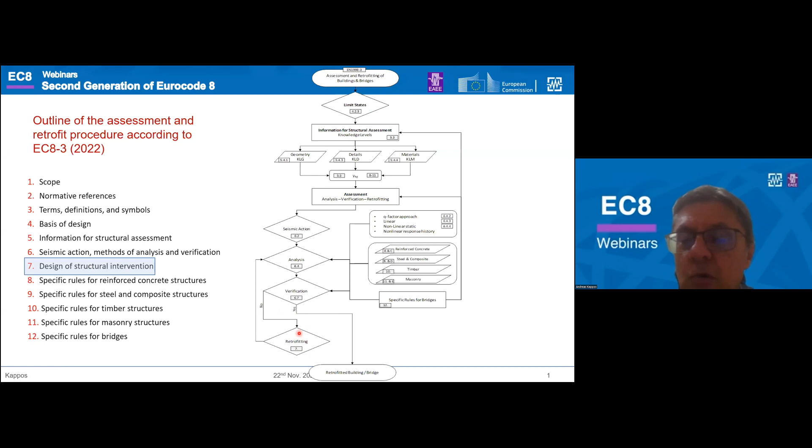And this is addressed, admittedly in a very brief way, in Clause 7, which is the design of the structural intervention, which actually comes after some sort of verification is not satisfied. So in this case, you will go to the design of your retrofitting. What are the key changes?

Well, as I said, the scope has been extended to cover bridges. This document is covering both the retrofitting of buildings and bridges. And after a very long discussion, which is also briefly referred to in the background document, a very brief background document that I had drafted for this clause, it was deliberately left out to allow some flexibility.

And the idea is that the code tells you how to verify your retrofitted or your upgraded building, but it only gives you some principles as to how you should structure or you should decide your interventions.

Interesting and important change is that for the first time it is explicitly stated that you can do this upgrading of your structure by reducing the demand, right? So by using some sort of passive system, but it does not give you any detail of these systems, because these are given basically in parts 1-1 and particularly in part 1.2 with more detail. It is clause 9 of part 1.2, if I remember correctly.

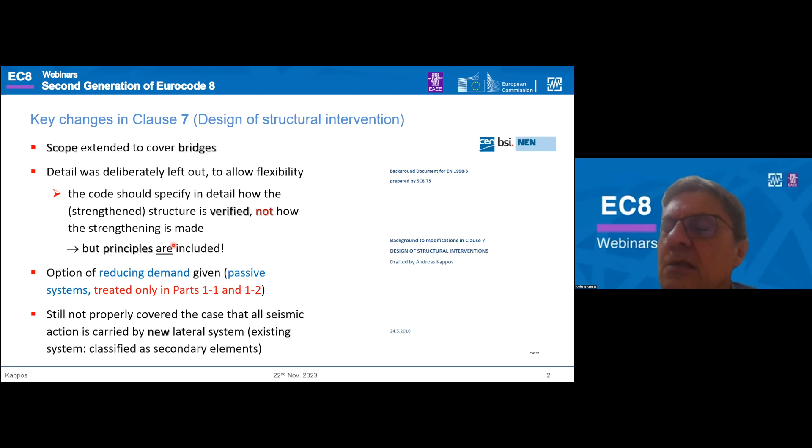Still not properly covered is the case that all the seismic action is carried by a new lateral system. In this case, it is not allowed to do what many people are doing all over the world. This is something that we would like to emphasize. Many engineers, for simplicity, say oh yes, I have put a new lateral load system, so all the lateral loads, basically the seismic load, will be covered by this new system, which is not correct.

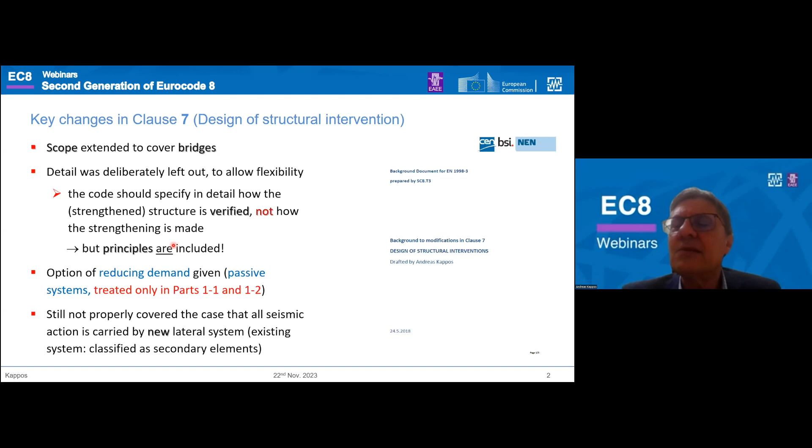You have to address only what happens to your existing structure, which is still there. So as a minimum, you should classify the existing structure as a secondary element, and you should take it from there.

Now, what are the criteria for structural intervention covered in clause 7.1? You should identify gross errors, and they should be appropriately remedied. In highly irregular structures, structural regularity should be improved both in elevation and in plan.

Of course, this is easier said than done. How can you do it? Well, can you improve it? You can improve this regularity by modification of the strength and the stiffness of a number of the existing components, or indeed by the introduction of new structural elements.

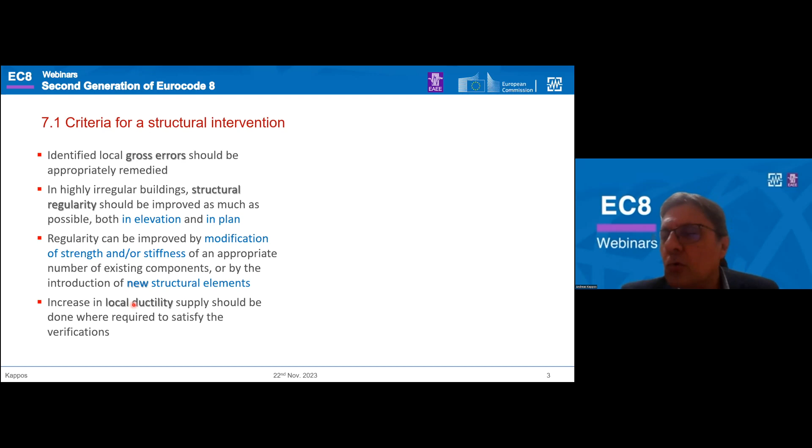For example, in a building, you could add some structural walls and improve the regularity. Of course, this should be decided on an ad hoc basis, keeping in mind that you may or may not have the possibility to add these walls due to architectural functionality reasons.

Increase in local ductility supply should be done where required to satisfy the verifications. Increase in strength due to the intervention should not reduce the available global ductility. So the two are interrelated here.

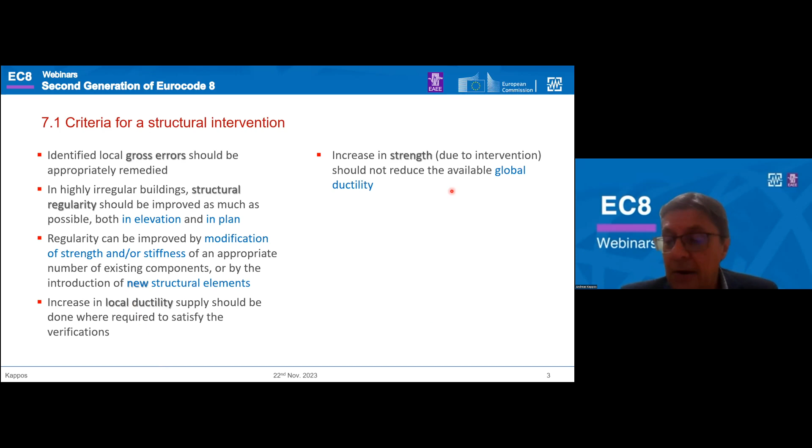And there is a specific subclause for masonry structures. Non-ductile lintels should be replaced. Inadequate connections between floor and walls should be improved. In my opinion, this is a very important requirement, or indeed, in this case, it is a recommendation.

And out-of-plane horizontal thrust against walls should be eliminated. And as I said, there is an option. Instead of strengthening or upgrading, as it is called now, the existing structure, you can reduce the seismic action effects by introducing seismic isolation, typically with some sort of additional damping.

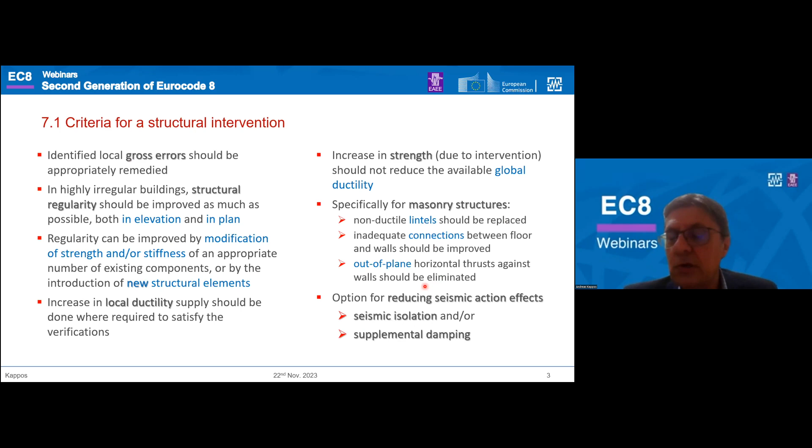What are the types of intervention, which, by the way, may be used in combination? Local or overall modification of damaged or undamaged elements, which may include just a repair if it is a slightly damaged element. Could be upgrading.

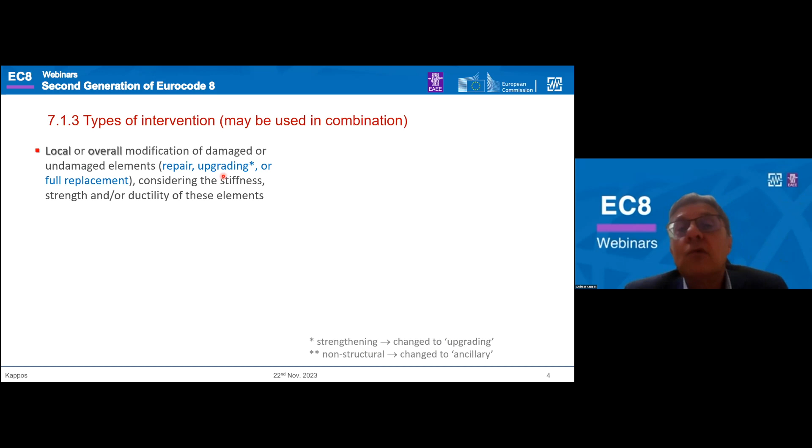Upgrading is the new terminology used for strengthening, in the sense that upgrading, for example, can also include isolation and dissipation devices, which is not the case with strengthening. Or indeed full replacement, considering the stiffness, strength, and ductility. Addition of new structural elements, for example, you may add braces, you may add steel, timber, or reinforced concrete belts in masonry construction, or indeed you can upgrade your infill walls.

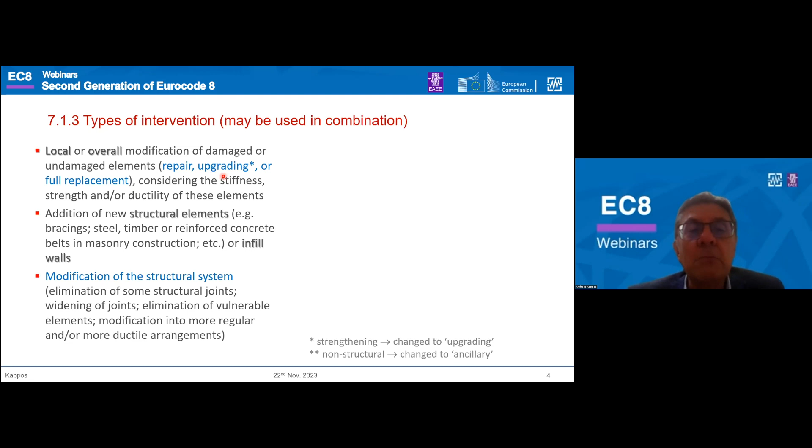Modification of the structural system: for example, you can eliminate some of the structural joints, you can widen, and so on. So there are several options. You may add a new structural system to resist part of or the entire seismic action.

I have already made my comment that in doing so, you should not forget that you have an existing system, and you should check that this existing system will not collapse or be very heavily damaged while your new system is still in a pretty good stage. This is a very important aspect in my understanding.

Possible transformation of the existing ancillary elements. The ancillary elements are what we called for many years the non-structural elements, but after a long discussion, now we call them the ancillary elements. I'm sure those of you who attended the Part 1-2 seminar have heard about them. Addition of passive protection devices, dissipating bracing and base isolation, or indeed mass reduction, restriction of use, or change of use of the building, which of course is not really good news for the owner of the building, as you may guess.

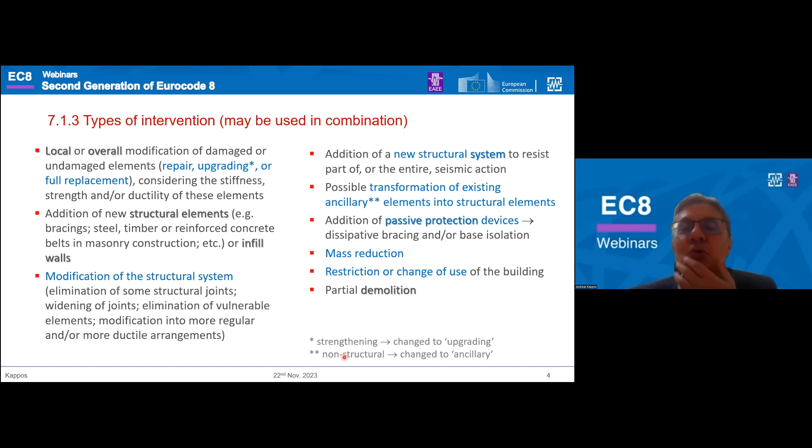And indeed partial demolition, which is even less good news to the owner. Okay, a few things about the ancillary elements.

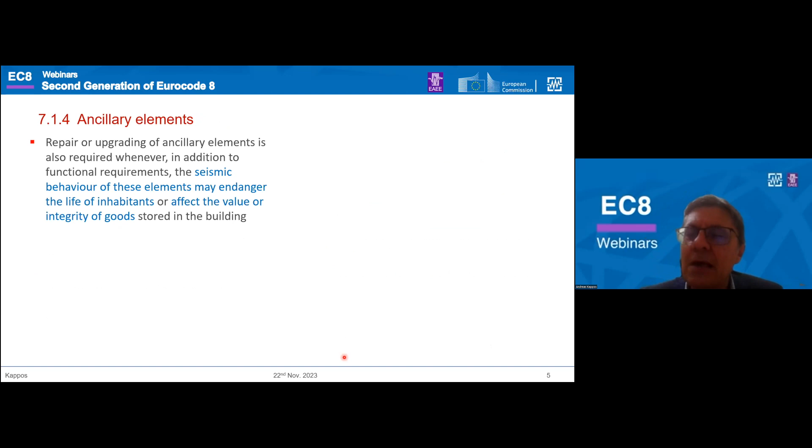Repair or upgrading of ancillary elements is also required whenever, in addition to functional requirements, the seismic behavior of these elements may endanger the life of the inhabitants or affect the value or integrity of goods stored in the building. I have read this verbatim because it is a very carefully worded paragraph. In such a case, of course, full or partial collapse of these elements should be avoided.

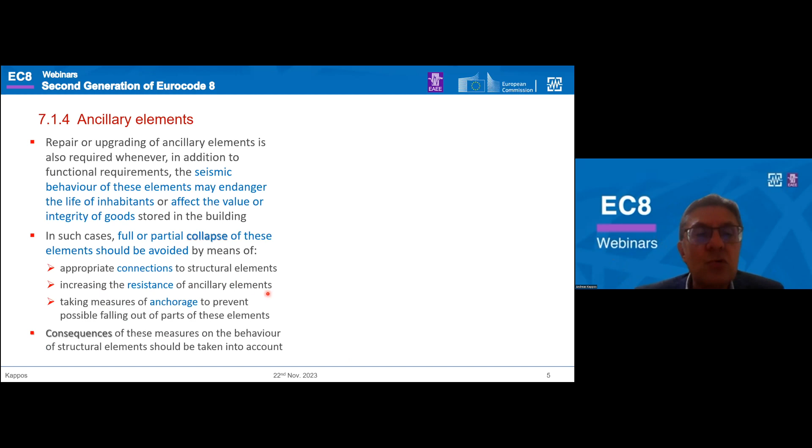How? By appropriate connection to the structural elements, increasing the resistance of ancillary elements—so basically making your masonry infills stronger—and taking measures of anchorage to prevent possible falling out of parts of these elements. Always the consequences of these measures should be taken into account and communicated to the owner.

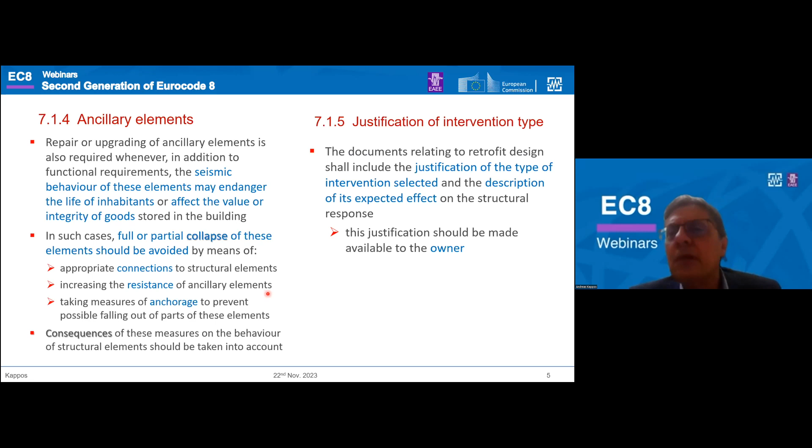The justification of the intervention type: the documents relating to this should include the justification and should be made available to the owner. Now, the second and last part of this section, of this clause, is the retrofit design procedure.

This, of course, is extremely critical. It includes basically three steps, all of them important: the conceptual design, the analysis, and of course the verification.

Conceptual design: first of all, it is strongly encouraged to use a preliminary analysis, which was also mentioned in a little more detail by Professor Franchin, because this can inform the selection of your retrofit scheme. Then the selection of the techniques and materials, and the type and configuration of the intervention—a very important part in the whole procedure.

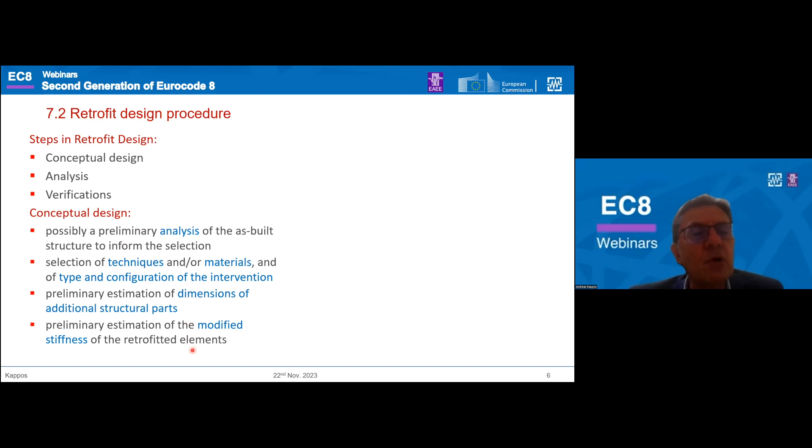The preliminary estimation of the dimensions of the additional structural parts, for example structural walls, and the preliminary estimation of the modified stiffness of the retrofitted elements. Then, of course, you have the analysis.

The analysis was already covered by Professor Isakovic. It should, of course, account for the modified characteristics of the building. The verifications, again as per section 6.5 and also 5.5 that Professor Franchin presented, should include both existing, modified, and new structural elements, and as a minimum—as I already mentioned in my first presentation—you should check the limit state of near collapse.

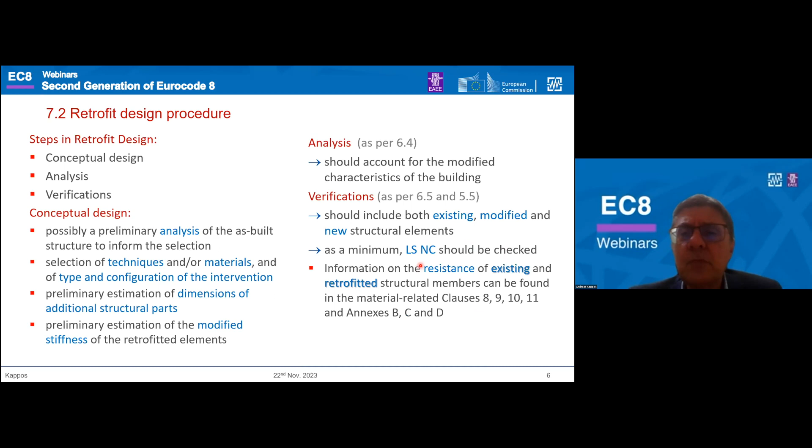Information on the resistance of the existing elements—how do you cover all these things? You need specific provisions depending on what material you are using, for both the existing and the retrofitted structural elements. What resistance does an element have with an FRP wrapping or, for example, a reinforced concrete jacket around it? For this, you go to the pertinent clauses.

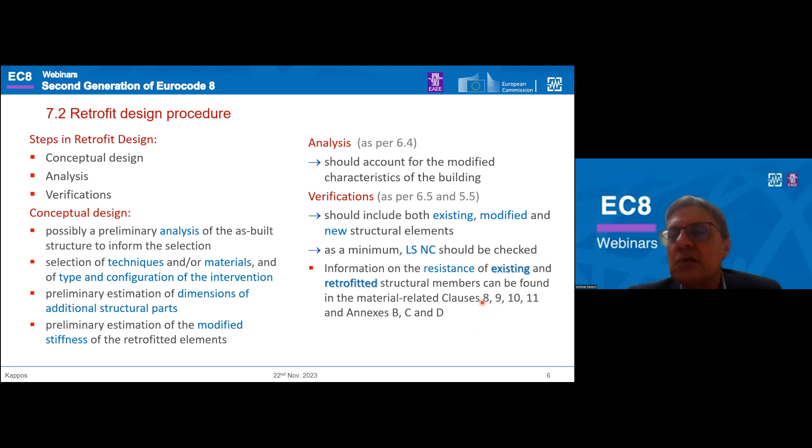Most of this information is found in clause 8 on reinforced concrete structures, with more limited information in the remaining chapters. Just to give you an idea, and not leave it at the conceptual level, you can find information on the resistance of retrofitted reinforced concrete structures in section 8.6. This, I understand, will be presented by Professor Chrysostomou later on.

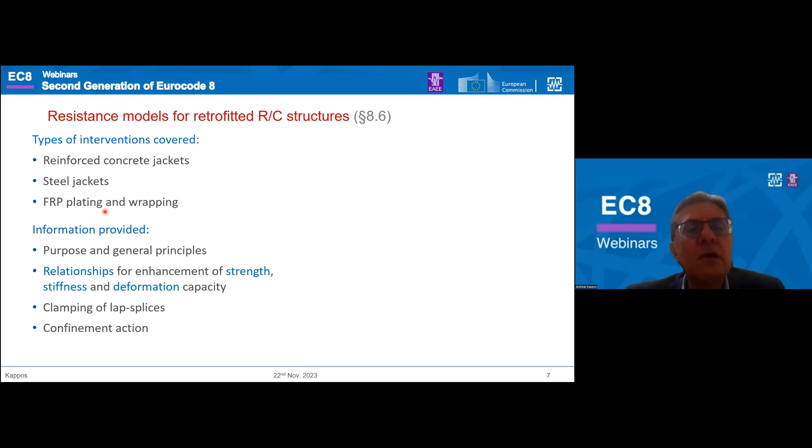Of course, not all types of new materials or new techniques are covered. We are focusing basically on those for which we had sufficient state of the art—sufficient testing data and so on. So we're covering reinforced concrete jackets, steel jackets, and FRP plating and wrapping. These are the ones covered, giving the relations for strength, stiffness, and of course the available deformation capacity.

Just as an example, for jacketing, which is arguably the most common type of strengthening, or upgrading with the new terminology, of concrete columns, but not only columns - also beams, even footings can be jacketed. The approach used is basically to modify the capacity, the resistance, or the deformation capacity of an equivalent section which is of a monolithically cast member.

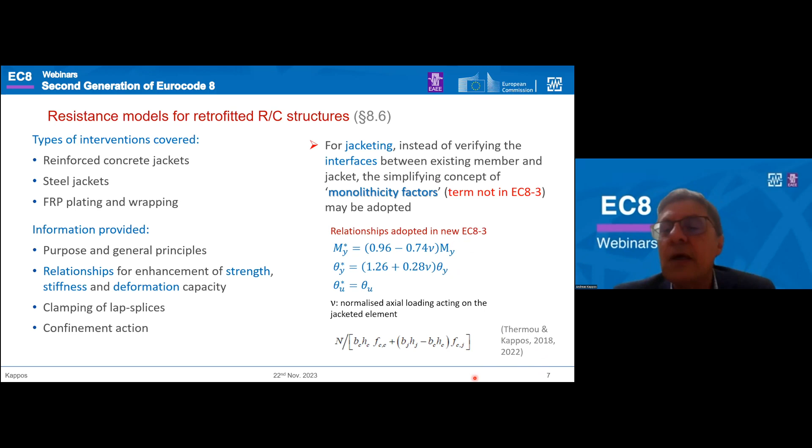These monolithicity factors, as many people call them, although it is not a term adopted in Eurocode 8 Part 3, the relationships in the new Eurocode 8 Part 3 are of this form: the yield moment of your jacketed section is the yield moment of an equivalent monolithic section multiplied by these factors. For the first time in the literature, we're introducing monolithicity factors which are not just dry numbers like 0.8, 0.9. They include meaningful parameters, and the most meaningful, as we found with Gina Thermou some time ago, is the axial loading, defined as here.

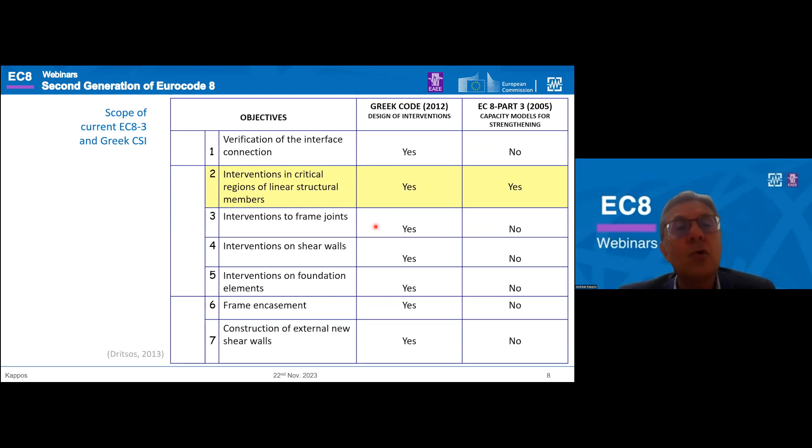This is basically the entire section. This is an interesting table that my colleague Professor Dritsos has compiled some time ago. It covers, strictly speaking, the current code, but most of the yes and no are applicable to the forthcoming new Eurocode 8. As we mentioned in the background document, in applying the code the engineer needs guidance additional to that given in clause 7. You certainly cannot carry out your retrofit design just by using these relatively brief provisions that I have just presented.

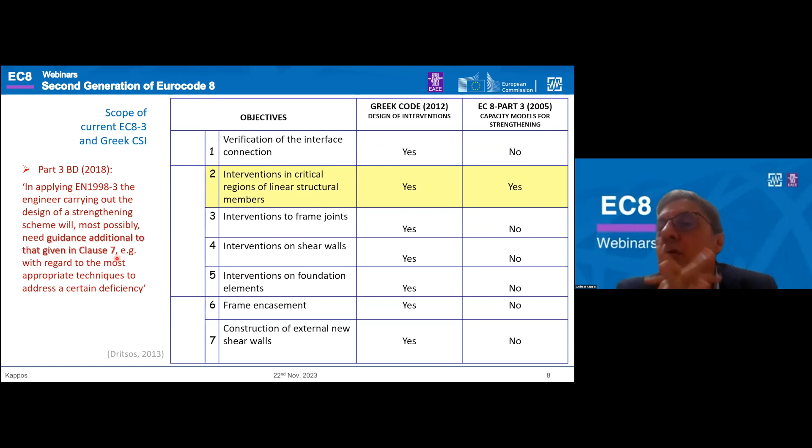So what can you do? I'm giving you some guidance. I'm not going to spend time on it for the sake of time, but I have included an appendix which is much longer than my main presentation, which presents these techniques for repair and for strengthening existing reinforced concrete members. It is based on a similar, but much more detailed, presentation that I made at the Balkan Summer School a couple of years ago.

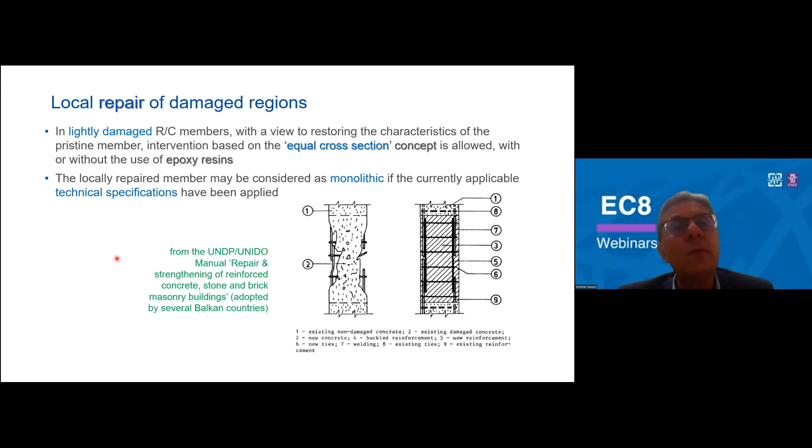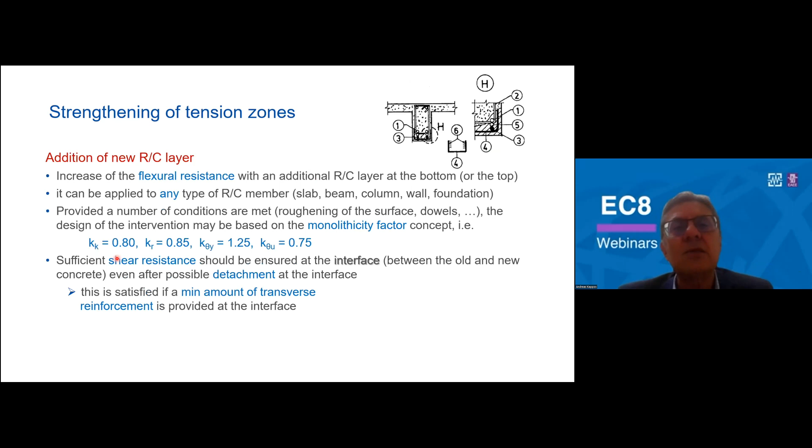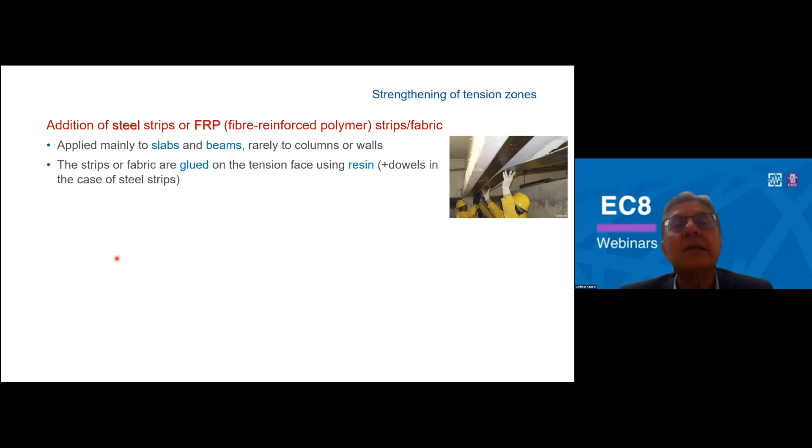Just to give you an idea of what is included, no comments at all - I'm presenting the local repair techniques, the strengthening of tension zones through jackets, where by the way we're introducing some monolithicity factors, even some rigorous modeling of concrete interfaces, and of course a lot of information regarding the FRP strengthening of reinforced concrete members.

I will stop here, Ricardo, because I don't want to abuse our time, but please be advised that you can download in due course from the site this very detailed appendix, which hopefully will be useful when you are trying to design an intervention scheme.